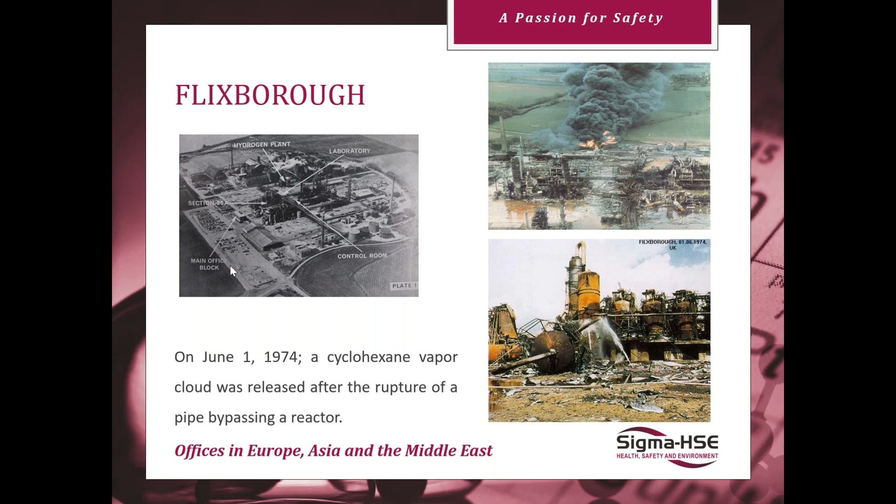So QRA would have given us good insight into how that might have been avoided in the first place. We can use it for risk management, for guiding our decisions as to how to make things better. We can increase awareness for hazards, and that leads into very good process safety management, like appropriate training for people. It helps with emergency response planning as well—if you know where people are most likely to be hurt, we can plan our emergency response around that.

It allows us to communicate our risk to the public as well. Whether you think that's a good idea or not, it is a legal requirement, especially if you are operating a COMAH site, where there is a duty on you to release information to the public. If you're going to have off-site effects, and QRA will tell you whether that's likely, communication of risk to the public is a good idea. It's also sometimes a duty under the regulations, where you've got major accident hazard potential, to do some form of QRA to demonstrate to yourselves, your shareholders, your customers, your suppliers, and your neighbours that you are fulfilling your duties under the regulations and that you understand your hazards and risks.

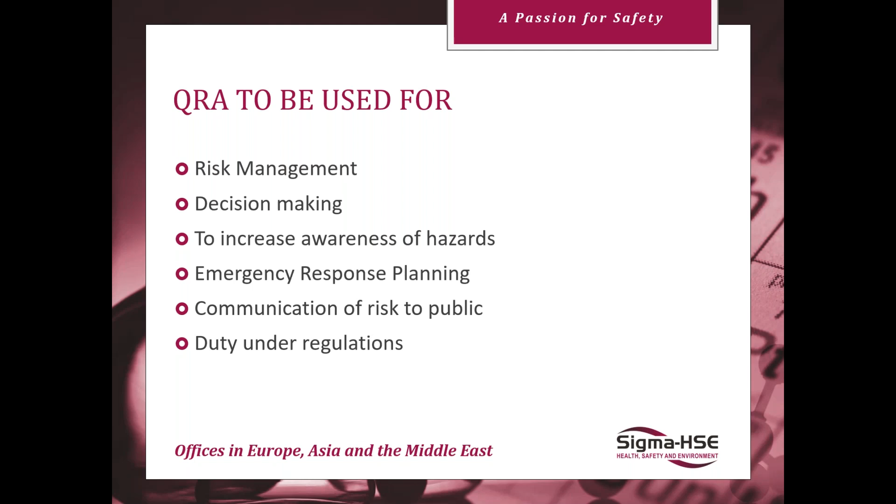So the process of risk management: first of all, what are we trying to achieve? What is the design intent? What is your process intended to do? Then the first question from the regulator: what could go wrong? We do that typically by some form of process hazard analysis, whether it's a HAZID, a HAZOP, a checklist, or whatever your preferred methodology is, depending on how big your risks are. How likely it is and how big an impact—that's the risk analysis part.

And how significant that is, and therefore what you need to do to reduce that risk, is the risk assessment. It's a case of 'so what?' Once you've done the risk analysis—risk of what, from what, and to what—then that fourth question is 'so what,' and that's the risk assessment side. Therefore, what is the most cost-effective control or mitigation option available to you? That's the risk management side—how you manage those risks and reduce them as a result of good management.

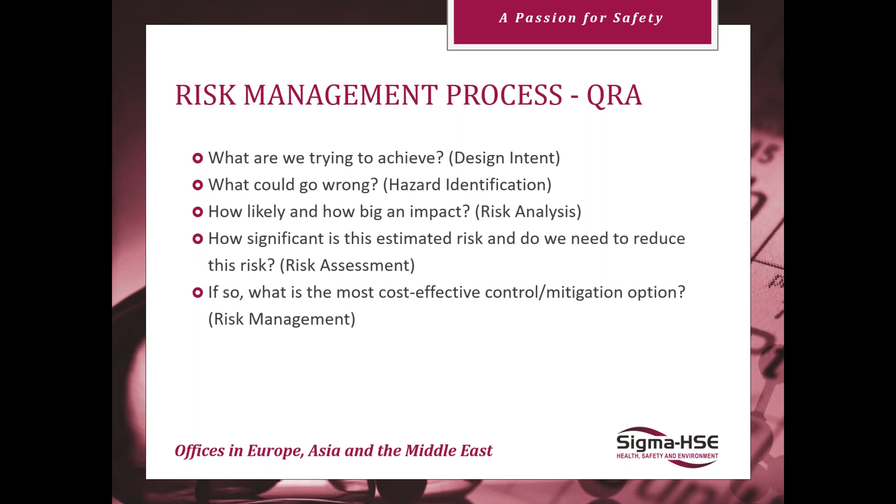So, as with all good policies and procedures, we have a little flowchart to help us do all of that. This is the one that we would typically use for a QRA methodology.

We'd set scope and do a site visit first of all. So there's a little bit of pre-work to do to define what the scope of the study is going to be, and then to visit the site and collect all the data that goes along with it. Things like hazardous properties of materials, the way that you're processing, the conditions of temperature, pressure, flow rate, and so on.

And then we can go into a form of hazard identification study, which will generate the scenarios. If any of you have been in either a HAZID or a HAZOP, you'll know that the way we generate scenarios is by these deviations from the design intent. And that gives us a number of potential scenarios along with their consequences.

So the frequency and the consequence analysis are what we need to do next, because one is the hazard, the other is the frequency, and together those are what give you the risk. Because this is quantitative risk assessment, we put some numbers on that as well, and we'll talk a little bit about how we do that in the coming up slides.

But by putting numbers against it, we have a numerical representation of risk, we have a numerical representation of consequence as well, and that means that we can be considerably more confident about the amount of harm that we're going to inflict potentially on people or on the environment by looking at the ranges to particular radiation levels or the ranges to particular concentrations if it were a toxic material.

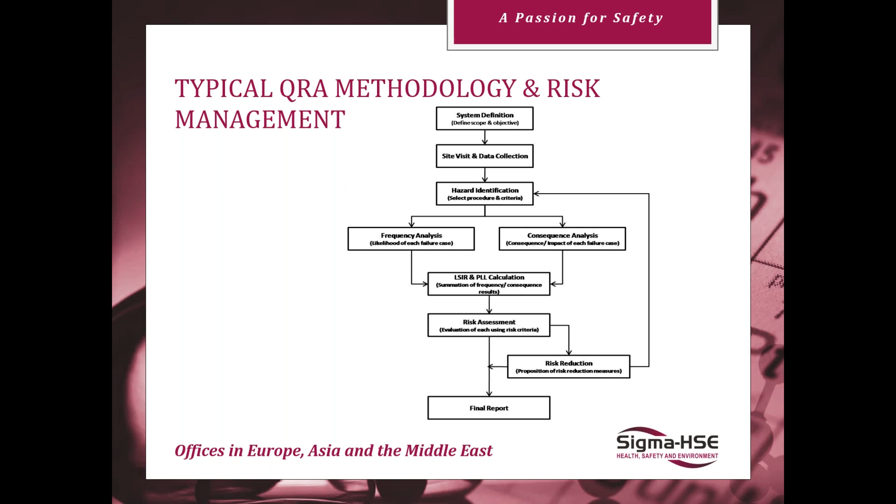So there's a little flow chart. For hazard identification, I mentioned a few other tools there.

They vary in terms of rigor, I suppose. That's probably the best way of putting it. If you've got a relatively benign process involving a lot of water and not much else, then things like checklists and brainstorming activities can work perfectly well. But if you've got a thoroughly integrated oil refinery or something, then something like hazard and operability study would be the way to go. But there are lots of others as well.

HAZID, if you've ever come across those, is like a HAZOP. It's sort of a HAZOP light. It still uses guide words and therefore it's quite rigorous all the same, but it's a little less resource intensive. But we have things in here as well, like failure mode and effects analysis, and fault trees and event trees, all sorts of techniques. Some more fun than others. It depends whether you do them with me or not, but yes.

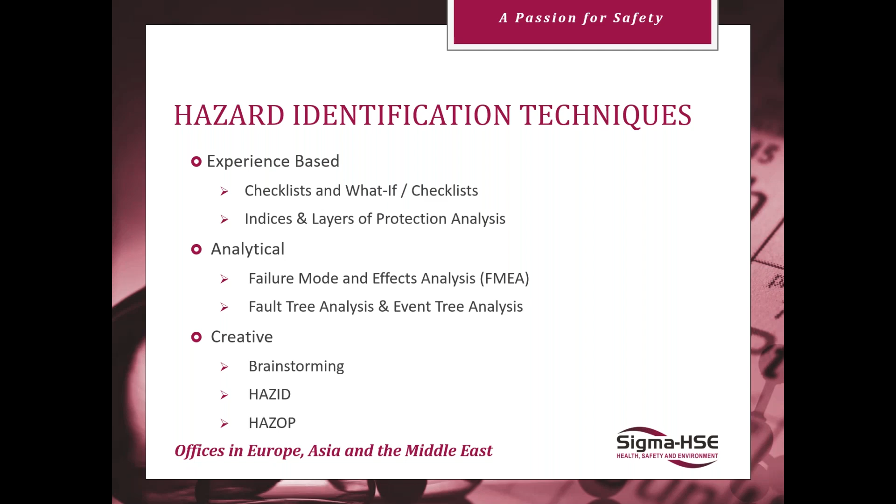Now, I mentioned right at the outset that we need to define a term, an extent of the study. Once we've got that, we sectionalize it. That's an awful word, but we divide it into sections or nodes or whatever it happens to be, your preferred nomenclature. But the idea is that if you can identify...

Isolatable sections, what the inventory is likely to be, in particular if you go, for example, between ESD valves, you've got a fixed inventory that sits within there, and that allows us to generate the worst case consequence rather than just having a portion, if you like, released. It also aids in the understanding of the process, so you're not faced with too many scenarios to model at any one time, and it means that every single element is given its own importance. And that's a very useful thing to do, having sections that are not too large that they become unwieldy, but not too small that they become unrealistic, or at least unrealistic to do in the time available to you.

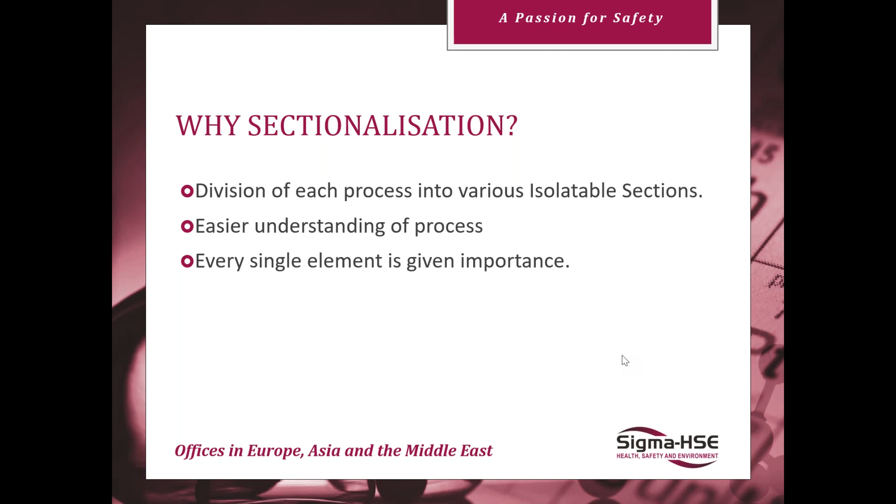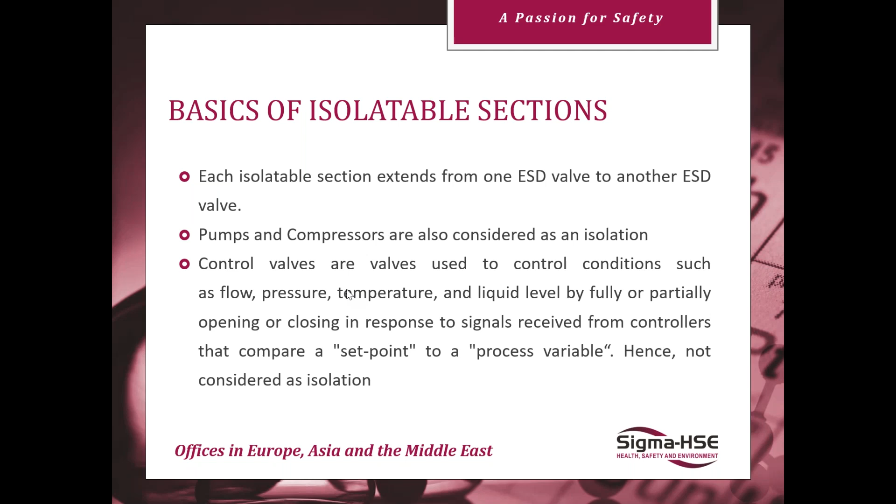Control valves are used to control rather than provide shut-off, so we don't usually consider those as isolations.

Now we can go into talking a little bit about the consequence calculations themselves. This is, at its most basic, the application of mathematical formula to the consequences from toxic and flammable releases. There are various tools you can use to do this, and they don't differ greatly because the underlying mathematics that supports them is well understood and pretty sound these days.

If you're looking at the release of material from an orifice, for example, you'll know this will be influenced by things like internal pressure and therefore the flow rate out, the buoyancy, the temperature, and atmospheric conditions as well. Those are built into the model, and at its most high level it's a normal distribution looked at with three axes - an axis running in the same direction as the release direction, one at 90 degrees horizontally, and one at 90 degrees vertically.

There are therefore three normal distributions you could look at, one in each of those planes. We use the mathematics - pressure, flow rate, etc. - to determine how wide that normal distribution is, and then use things like weather conditions to influence the shape of the normal distribution. We can distort it to one side or another via manipulating the standard deviation. If you didn't get all that, I don't blame you.

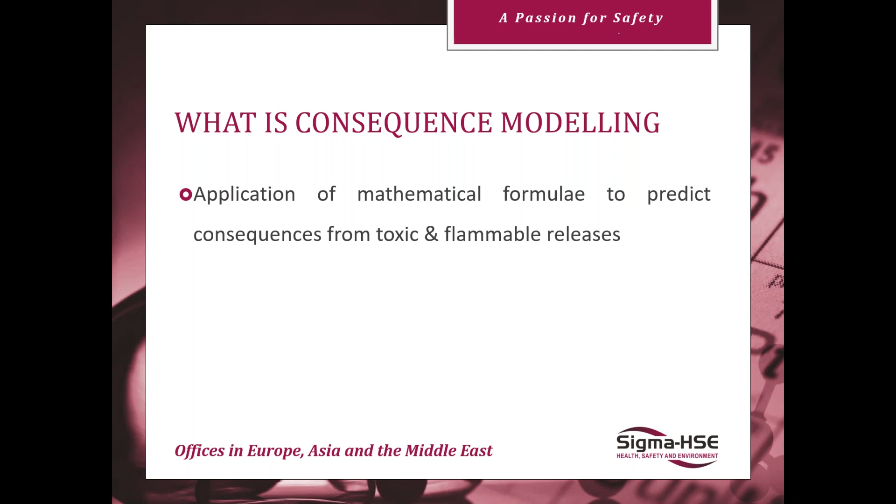We need to model various discharge rates. We need to know the size and shape of flammable and toxic gas clouds in order to see what happens when that encounters a person, whether we ignite it or not. The consequence modeling software will also tell you the distances to various levels of radiation or to various concentrations if it were a toxic release, and also the distances to various overpressure values in the case of explosions.

What I haven't found that it does at the moment is sudden releases of energy due to things like a pressure burst - for example, if you just popped a balloon, the pressure burst associated with that is slightly different. But there are other tools and techniques for modelling that kind of event.

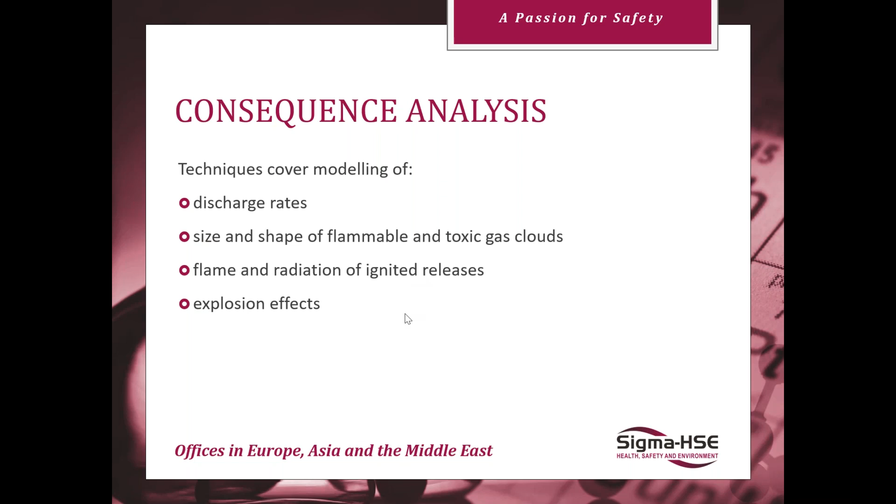So there are a number of consequence effects that we would look for. If we ignite things, we've got various forms of fire - a pool fire, a flash fire, or a jet fire. If we had a toxic release, we can have just a concentration that proceeds downwind and has the potential to hurt people.

And for explosions, we've got various types here as well - a BLEVE, or boiling liquid expanding vapor explosion, vapor cloud explosion, or indeed a detonation. We never used to consider detonations as being terribly likely to happen, but since Buncefield, which proceeded to detonation, we now include that as well, known as a Buncefield type incident. It essentially means it's not just a combustion reaction going on - the molecules are physically being banged into one another by a propagating shockwave, by virtue of having confinement in the area and congested plant, which tends to accelerate the flame as it goes around obstacles.

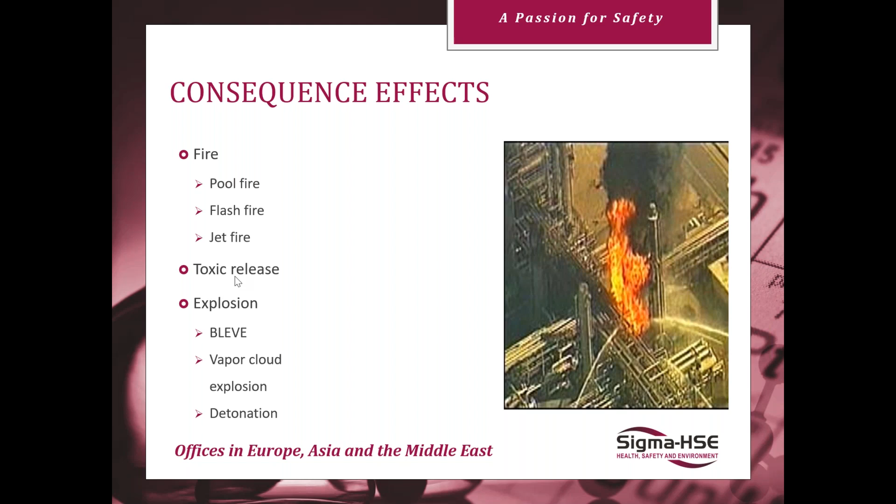So those are the various effects that we can have. For jet fires, let's have a quick look at those. This occurs where gas is atomized, or an atomized liquid is ignited close to the source of release, and you end up with a jet flame as a result.

The amount of damage it can cause depends where you are, essentially, because they are pretty directional, as you might expect. The length of the flame and the direction being the principal things you would want to know, but also the temperatures you could get up to, the radiation levels you would generate from these events. Typically, they can burn very, very hot indeed.

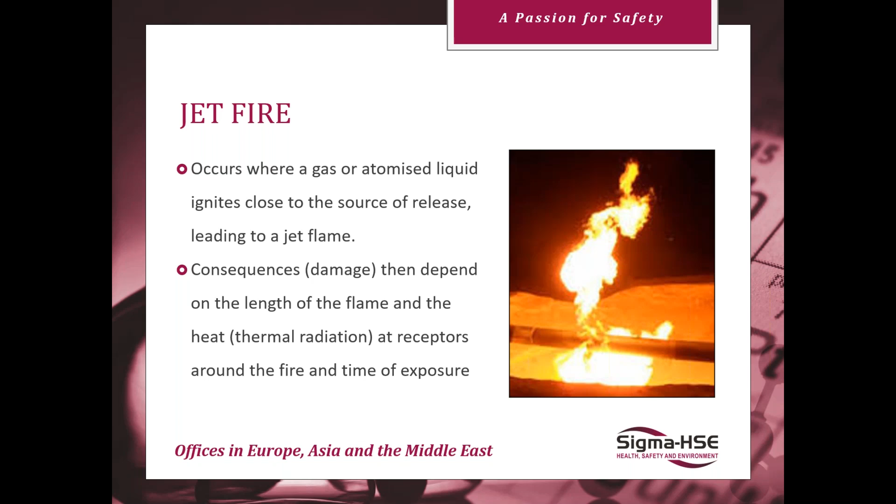Pool fires: a flammable liquid forms a pool, which then ignites. Again, it's the thermal effects. We generally assume people have a pretty good chance, unless they're actually caught in the pool, then it's much easier to walk away from a pool fire.

If it's a running pool fire, they don't tend to go that fast, although they can, of course.

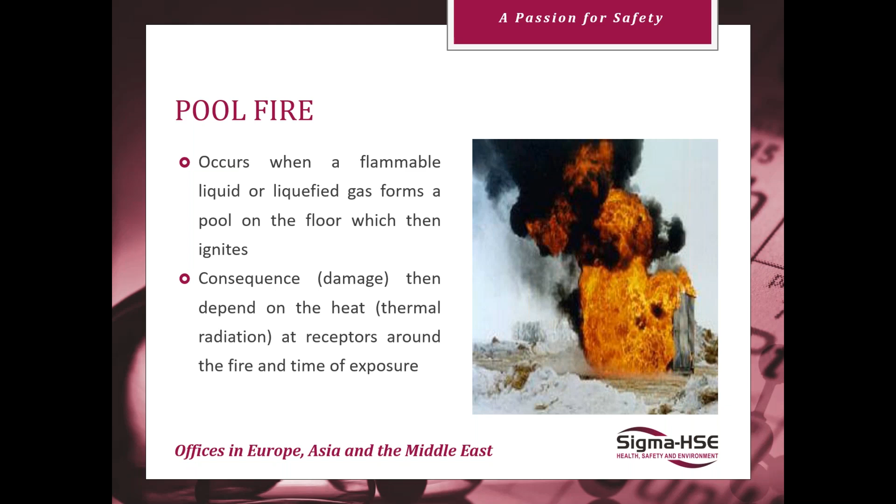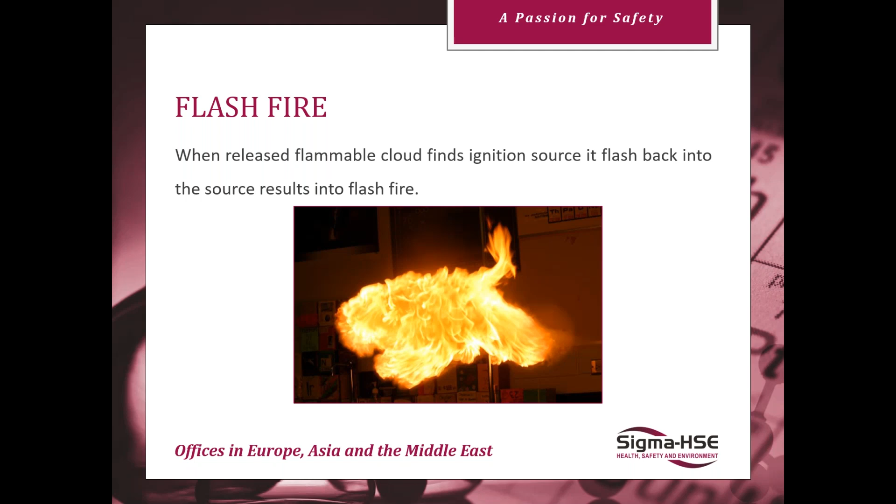Flash fires: a flammable cloud is released, it doesn't ignite initially, but finds a source of ignition subsequently and then flashes back to the source. That's what we'd call a flash fire. It's slightly different, it's less violent but very hot, less violent than a vapor cloud explosion, which is the next one, where we have a little bit of confinement.

In order to have an explosion, you need something for the combustion gases to react against in order to generate pressure.

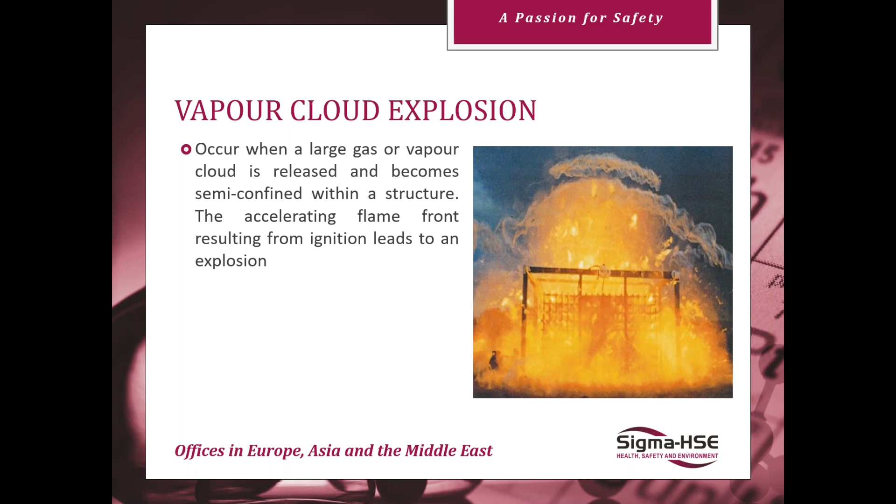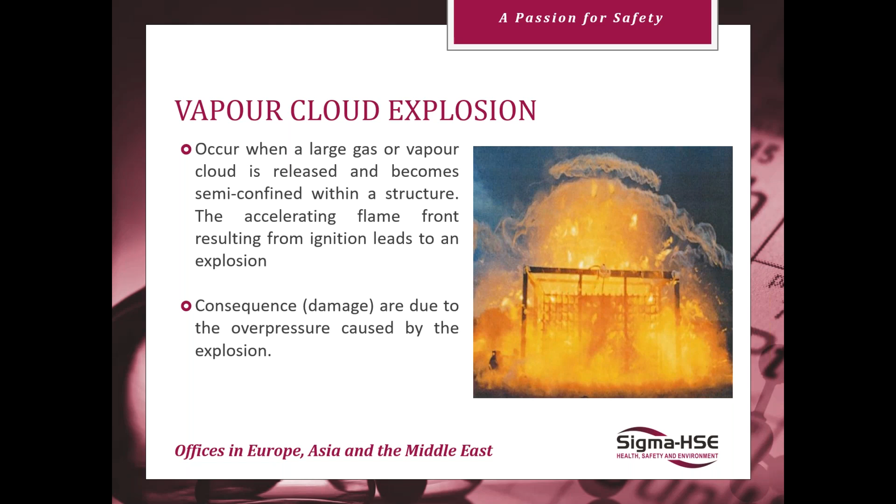The flame front tends to accelerate, and if it's unconfined or has less confinement, it accelerates to less than the speed of sound. If it accelerates to greater than the speed of sound, as is the case with gases like hydrogen or ethylene, those can proceed to detonation quite well, which is why you tend to get more of a bang with those. As well as the radiation effects, you've got the consequence arising from the overpressure generated by the explosion, this accelerating flame.

A BLEVE, if you've come across these, no doubt you've seen the videos on YouTube of boiling liquid expanding vapor explosions.

Essentially, you've got something that wants to be a gas, restrained by, for example, a vessel, and that vessel goes, and everything that wanted to be gas suddenly finds its opportunity to become gas. If it's flammable as well, then you can end up with a very, very violent explosion, but you don't need it to be flammable, because you've got the vaporization and the change in volume that's also associated with that change in pressure. So as it vaporizes, it generates the consequence at the same time.

They are extremely violent explosions. So if you haven't seen the videos on YouTube of a BLEVE, go and check those out.

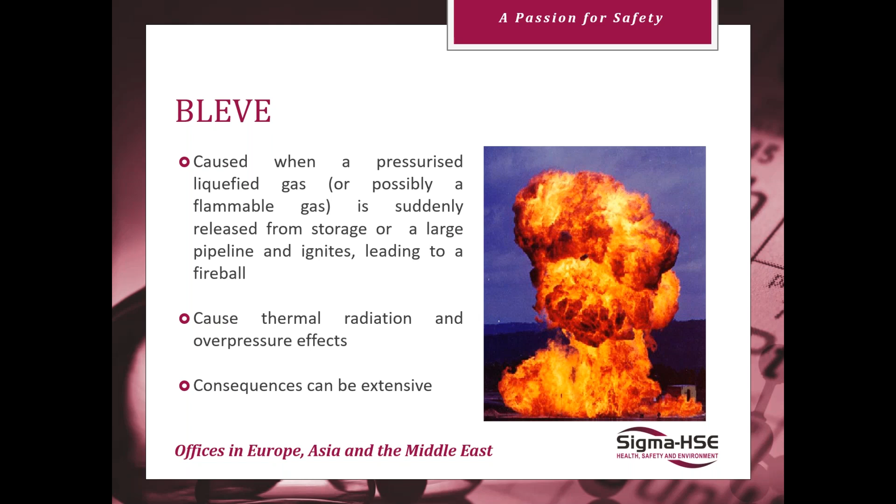So the modelling will give you the distances to various radiation levels as a result of the consequences I've just described. Other things we need to take into account are built into a lot of the modelling software as well.

These are things like atmospheric stability. We have two considerations to look at. One is thermal turbulence, which is just the natural heating and cooling cycle of the land mass in the atmosphere. And then there's mechanical turbulence, which is generated by the wind speed. This is a tricky one, because it can lead to counterintuitive effects.

If you think about a release from, for example, a relief valve, which is up at high level and perhaps angled away from the vertical by about 45 degrees: if you had a very fast release, a high velocity, a high volumetric flow rate through there, you might expect the cloud to go further, because you'd be considering things like momentum of the cloud, and you'd be right in that respect. However, there are other things that influence that, and as you have a higher speed exiting the tailpipe, you can also get a higher entrainment of air, which tends to dilute that cloud a little faster than it might otherwise have been.

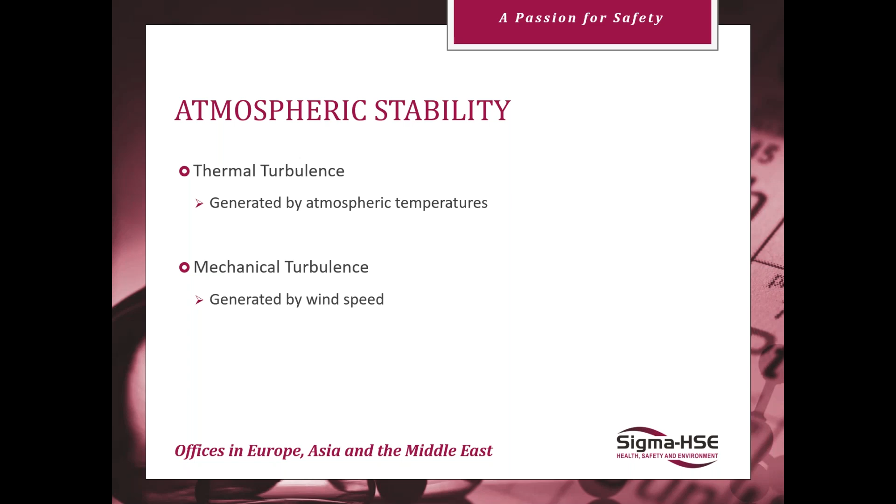So you can end up with almost counterintuitive concentrations downwind of the release. Modelling is important to do in that respect, because you wouldn't necessarily know that any other way than if you actually applied the mathematics to it. So it's worth bearing in mind.

We generally model according to something called the Pasquill Stability Scale. For the UK, we use 2F and 5D a lot. The 2 refers to the wind speed, so 2 meters per second, and 5 meters per second. The letters tell you whether it's day or night and how much sunlight you're getting. So 2F is a clear light wind night, and 5D is a little bit breezier, could be in the day or at night, doesn't matter.

But those two have an effect on the normal distribution that I mentioned earlier. They can move the cloud further downwind than you otherwise might have expected, or to one side, or increase or decrease buoyancy as a result as well. So it's important to know where you stand and do at least a couple of different weather types when looking at the QRA.

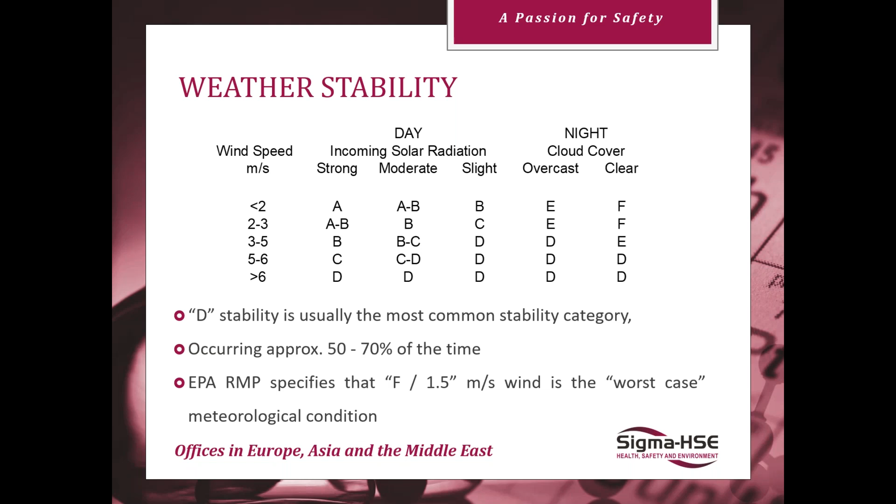Event trees are very useful. Depending on the type of release, we can build this into the model as well and do a frequency analysis on what is the most likely impact of having the loss of containment.

And for an instantaneous release, it's a similar sort of exercise. Whether it's more likely or less likely to be any one of these is going to be down to the material properties, your judgment, whether there is a hard source of ignition nearby, or whether you've got good design. You've had somebody like Sigma come in and do your design risk assessment. You haven't put any flares nearby, and the smoking shelter isn't nearby either. So that'll be very much down to the way you operate.

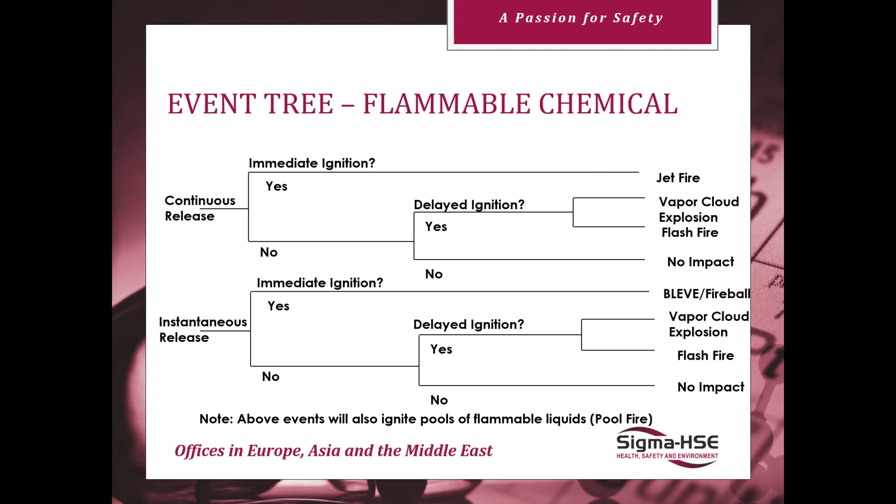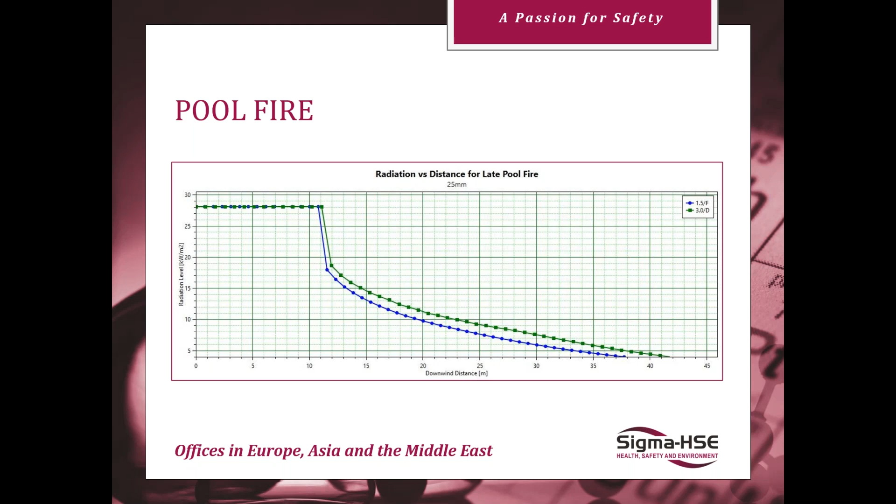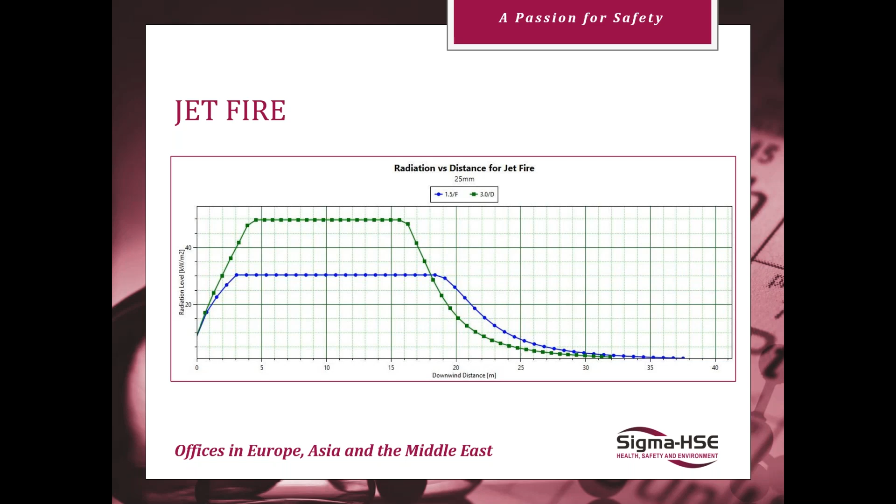For a jet fire, we have a similar sort of plot. Once you're downwind, the radiation level drops off. And again, you can see there that we've done this for two different weather conditions, 1.5 meters per second wind velocity under stable conditions, and 3 meters per second velocity under less stable conditions. So you see that those weather conditions do indeed make a little bit of difference. And that difference could be significant, especially if there's somebody standing there.

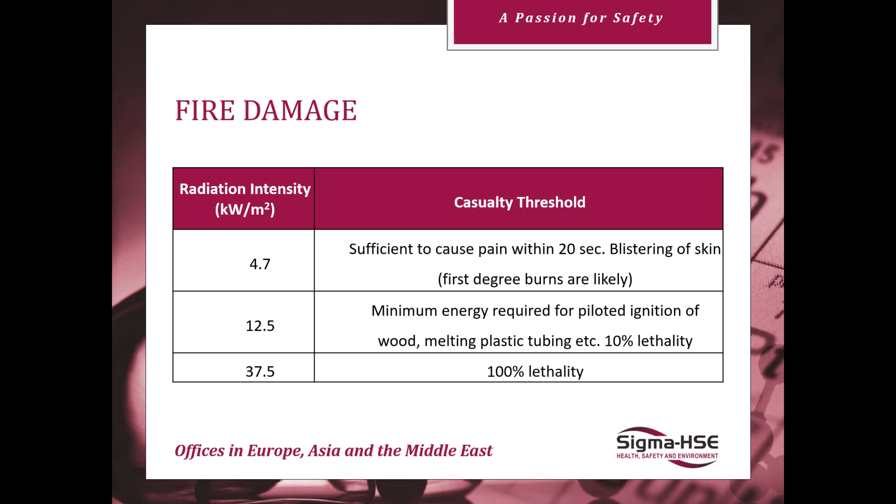Now, judging whether you're going to do any harm or not requires some kind of measurement and thresholding. And we generally use 3 levels: 4.7 kilowatts per meter squared, 12.5, and 37.5 - 37.5 being 100% lethal, and 12.5 being around 10% lethality as well. It gives people a chance to get away, but it still wouldn't be very pleasant. And 4.7 is still causing burning of skin and so on. So people would tend to escape from that quite quickly, but it doesn't take much more for it to become lethal. So it's worth understanding those numbers.

For a flash fire, we've done a plot here, and you'll notice now that we are more omnidirectional. So this is a plan view of a flash fire envelope. We've got crosswind distances and downwind distances. So the plots that you see correspond to flammable limits, or percentages of flammable limits. I think we go down to half of the flammable limit, 50% of the LEL. And that gives you the range over which you might expect to ignite your cloud if there were a source of ignition present.

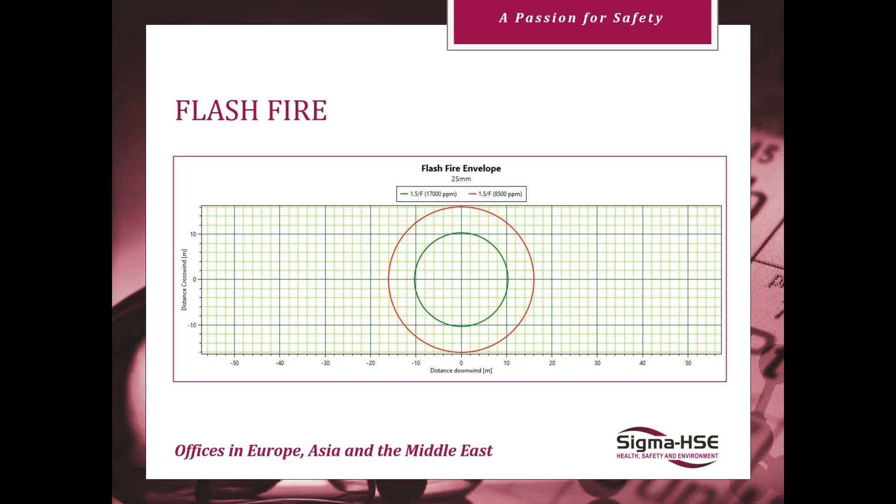The reason we have data like this is that we've done testing. Places like the HSL, the Health and Safety Laboratory, they will test explosives, and it's a power law relationship. So they'll set off a certain mass of TNT and then work out what the equivalent is based on the chemistry of the component that you're handling. The other way that we've got the data, for example, for the damage to buildings, is because we have very good data from the Second World War. When bombs were dropped on London, we got a very good idea of the amount of damage that a particular overpressure level could do.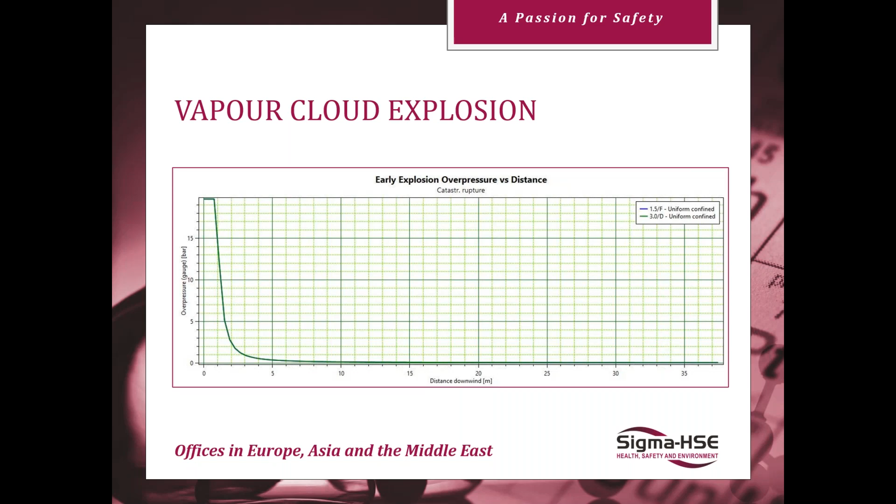So for explosion damage, we have a similar sort of scale. We work here to 0.03 bar, 0.1 and 0.3 bar, and the effects on structures and the effects on people as well. It's generally speaking better for you to be outside in the event of an explosion, because it's things like flying glass and collapsing walls and buildings that produce an awful lot of the fatalities associated with explosions.

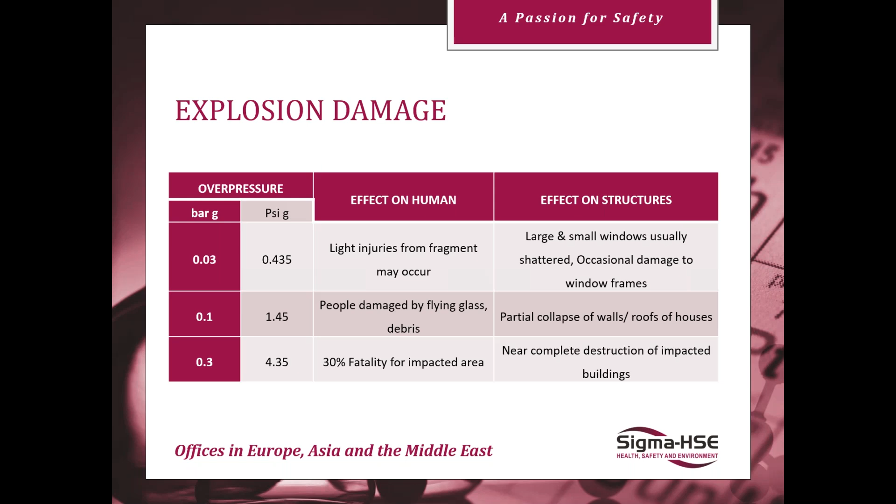And then toxic impact as well. We have two things to consider with toxicity. One is the nature of the chemical and its mechanism on the human body, and that's its toxicity. The other is the exposure duration, the amount of time that somebody might be exposed to it. And that, when it comes to consequence modelling, is absolutely critical. It's a function both of concentration and of duration.

So for some chemicals, a high concentration for a short duration might give you the same effect as another chemical's low concentration for a much longer duration. And we have means of extrapolating that and working it out.

But first of all, you would get an MSDS, a material safety data sheet, which will give you the limits, which are quotable limits. Things like the ERPG, the Emergency Response Planning Guidelines, IDLH, immediately dangerous to life and health, TLVs, threshold limit values, short-term exposure limits, and so on. Those are tied into concentrations and times.

Now, some years ago, I was looking at the release from a single cylinder of carbon monoxide. Because the scenario we were looking at was where it discharged in about 2 minutes, these values were not much use to us.

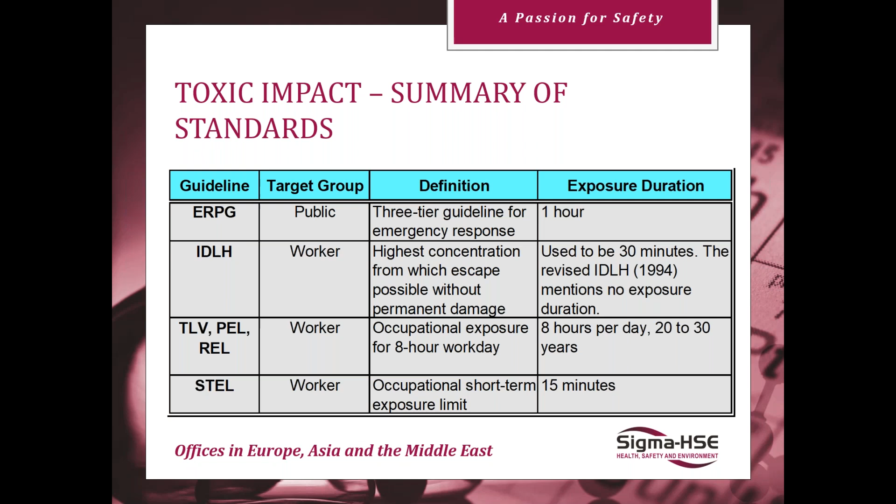So if you do that, it means you can tailor the concentration that would give you that dose to the time that people will be exposed to it. In my case, it was 2 minutes. If anybody was standing next to the cylinder for the full 2 minutes, what sort of dose would they get, and was it likely to cause them any harm? The ERPG and short-term exposure limit would not have been any help, but you can derive those figures from things like the SLOT and the SLOD. So I actually find those two measures considerably more useful than the ones on an MSDS.

So we've got an idea of what the consequences might be, and we've got some numbers that go with it. Now it's time to look at the risk side of things, the probability or the frequency with which we might get the release in the first place and have that harm occur.

So the likelihood is the probability or the frequency of an event, and it's estimated as one of the event for which we calculated the consequence -- my slides are out of order -- yes, that's right, that's fine. So it's the scenario for which we're calculating the consequences.

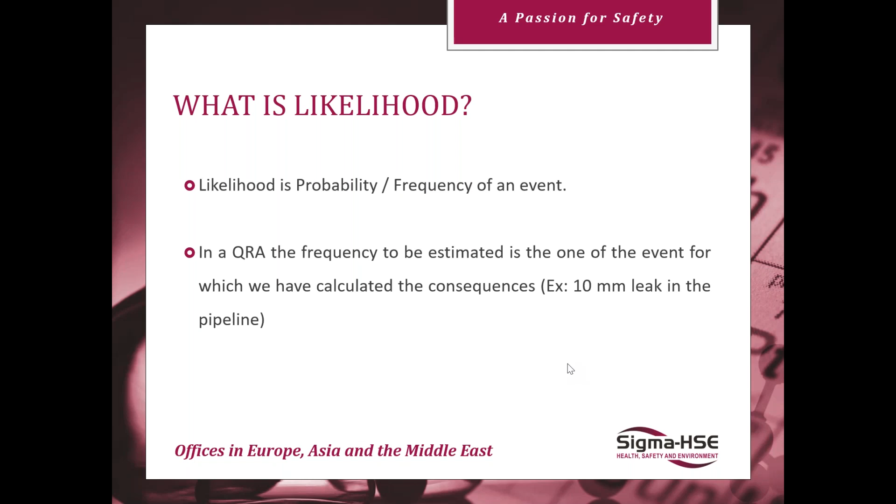For example, a 10mm hole in the pipeline. So we need to know how often we might get a 10mm hole in the pipeline. The way we do this is to first of all conduct a parts count. For each isolatable section, from our sectioning or sectionalization earlier, we look at the number of components, valves, and pieces of fixed equipment, and fill them in on a sheet.

And then we compare that with a base frequency sheet, available from various agencies. The UK HSE is quoted here, and the OGP -- I've forgotten that particular abbreviation, it's going to escape my mind at the moment -- but it includes the release frequency for various leak sizes and various pieces of equipment.

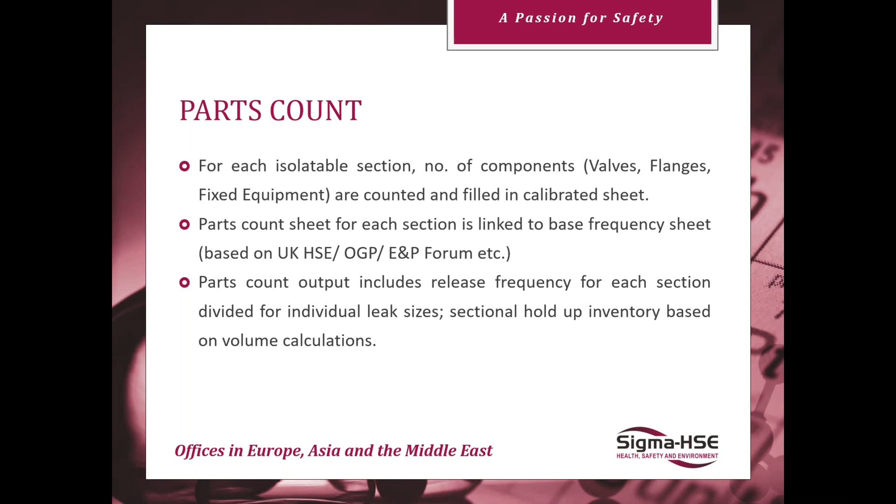I'll show you an example of what one of those looks like. So this would be a base frequency. For things like compressors and centrifugal pumps and so on, we've got a variety of hole sizes and the frequencies associated with getting holes that size. Same for filters, flanges, heat exchangers, pig launchers is in there as well. So those are the frequencies we might expect for that kind of hole or release per year.

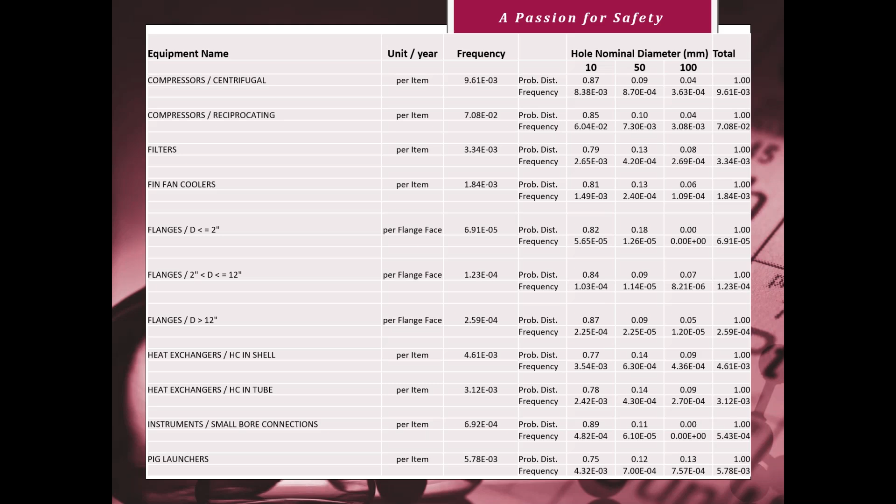Obviously, the more that you have of various items, the more likely it is, because you've got multiple opportunities for it to happen. So we tie it into a sheet like that, and we produce our own sheet, which might look like this. We'd look at the inline equipment, see how many pipe runs we've got of a particular diameter, compare that with the base sheet, and that's going to give us a factor to multiply by that base frequency, giving us an overall frequency for the section of plant we're looking at.

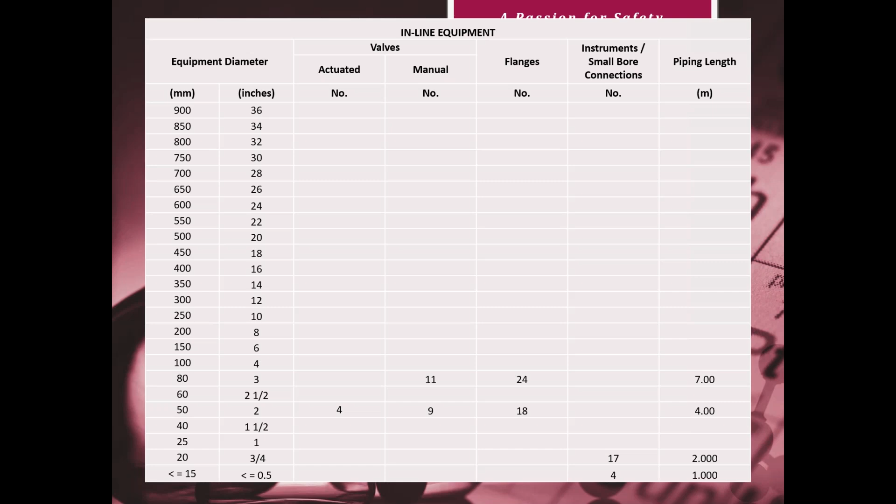We would do normally a range of leak sizes as well. Bear in mind that a smaller leak size is going to have a lesser consequence than a larger leak size, unless you don't notice it. A 2 mil hole might go unnoticed for a while, whereas a pipeline rupture you might notice quite quickly. So be careful when comparing apples with apples, as they say. But we would do a range normally: a small, a medium, and a large hole, and some ranges there, and also a full bore rupture.

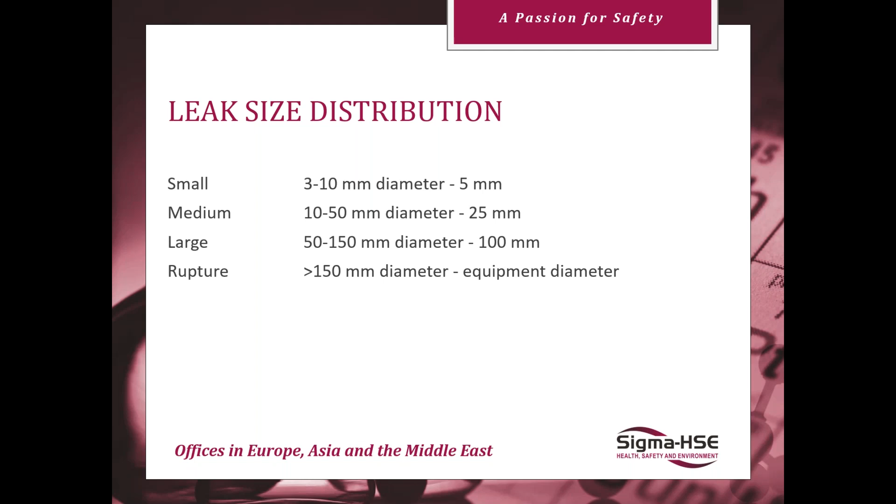This is fairly standard, and those of you who come from COMAH sites will be very familiar with that kind of approach. There is also a database provided by other agencies. I mentioned the UK's HSE database. DNV has its own database, the Centre for Chemical Process Safety, the CCPS. The TNO, the Netherlands Organisation, it used to be called their Purple Book, I think, but I've slept since then. They've updated it - it's now called the BEVI 3.2 guidance. Cox et al., the Lees Loss Prevention in the Process Industries as well, which will give you some frequency data as well.

Now, a word of warning on this as well. If you use database values, bear in mind that those values will have come from all possible corners of the earth, under all possible maintenance regimes and qualities of company, shall we say. If your maintenance program is lacking, leaves a bit to be desired, maybe you haven't done any for a while, your frequencies might be worse than the ones quoted in the database. So be careful - make a realistic qualification of where you actually use these figures, to make sure that you're not claiming credit where it's perhaps not due.

But what this allows us to do is come up with initiating event frequencies in a structured and thorough, or more robust, way. So we get a genuine idea of how likely it is that for that year, we're going to get a 5 mil hole in a particular piece of plant. That would give us the likelihood of getting the release in the first place, but we also need to look at what the likelihood is of getting a particular consequence as a result.

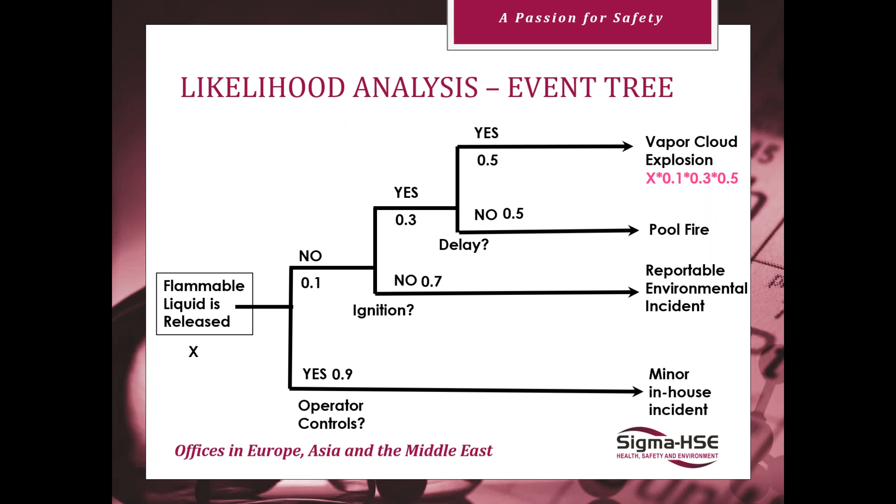And again, this will very much depend on the way you operate, as to whether you think you've got your source of ignition under control, the particular material properties - is it likely to self-ignite like hydrogen will - whether you've got an operator nearby in order to do some control, whether your control system is going to report the relevant data quickly enough to him to enable him to effect an action, and so on. So you can choose the likelihood of the yes and no answers to each of these to fit your own circumstances and come up with a likely, or the most likely, consequence as a result.

So therefore, we need to consider all these things. The frequency, we look at that through the base frequency and the databases that we looked at. Your plant itself - the number, the inventory of equipment, the fittings that you've got, so your parts list. Where there is automation to isolate, which means you've got a fixed inventory at a known pressure and temperature, so you know what's escaping. The probability of ignition is going to depend very much on the size of release, the material properties, and the way you operate. The weather, the wind direction, what time of day it is, and of course whether that is going to hurt people - so the number of people and the probability that they are local, or at least within the cloud or within the radiation envelope, in order for them to be hurt as well, and therefore the probability of fatality.

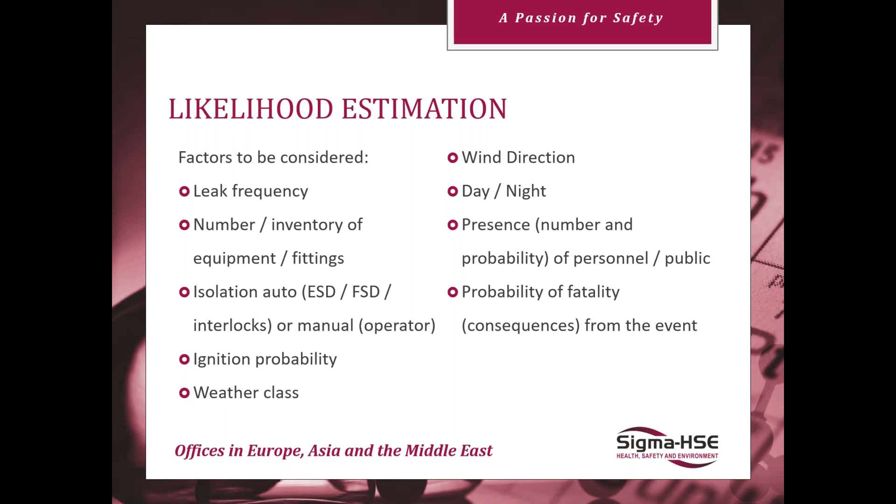That ties us right back into the abbreviations I introduced at the beginning: PPL, the probability of a fatality, and LSIR, the location-specific individual risk - how likely it is that we hurt somebody as a result of all this. That's where we come into the risk summation and analysis, looking at how we use these figures to make people safer.

So we have two measures: individual risk and societal risk. Individual risk is the risk experienced by this hypothetical person at a particular location. It doesn't have to be the same person - if somebody is on plant at a particular location and relieved by somebody else, they count as this single hypothetical person, because it's the location and the consequence that matter. It's not whether we hurt Joe, it's whether we hurt anybody at that location.

So this gives us two measures, the location-specific risk and the individual-specific risk, expressed per year. That allows us to tie into a tolerability criteria - how often are we prepared to kill people? That sounds bad, doesn't it? We should be never, but how often does it have to happen before we get prosecuted and find ourselves in serious trouble?

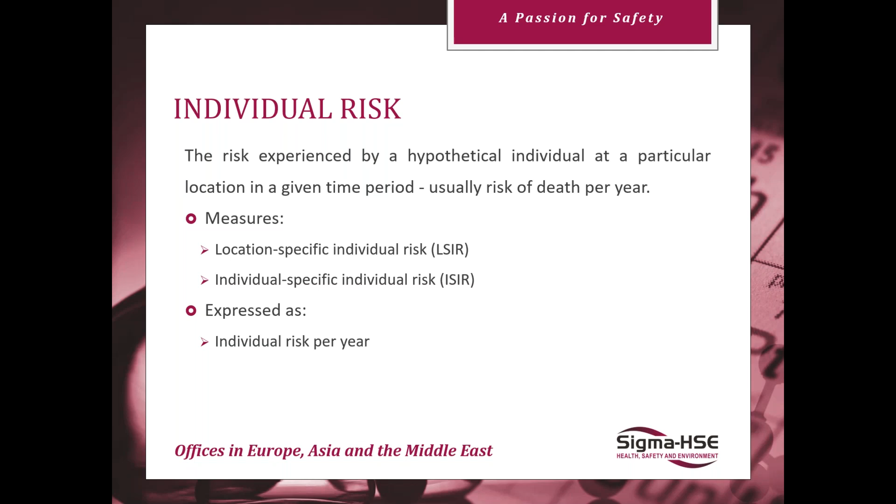And then there are individual risk contours, which is a commonly used presentation to inform the public. It's mainly used for land use planning, actually. That represents a contour which represents the frequency at which any person assumed to be there permanently sustains a given level of harm. So it's a frequency plot.

Typically in land use planning we use a 3-zone plot, calibrated to a 50% risk of fatality at rates of 1 times 10 to the minus 5, 1 times 10 to the minus 6, and 3 times 10 to the minus 7. That's 1 in 100,000, 1 in a million, and roughly 3 in 10 million - but that's a 50% risk. You can plot those on a map and determine the number of people who might be hurt from a societal point of view from a single event.

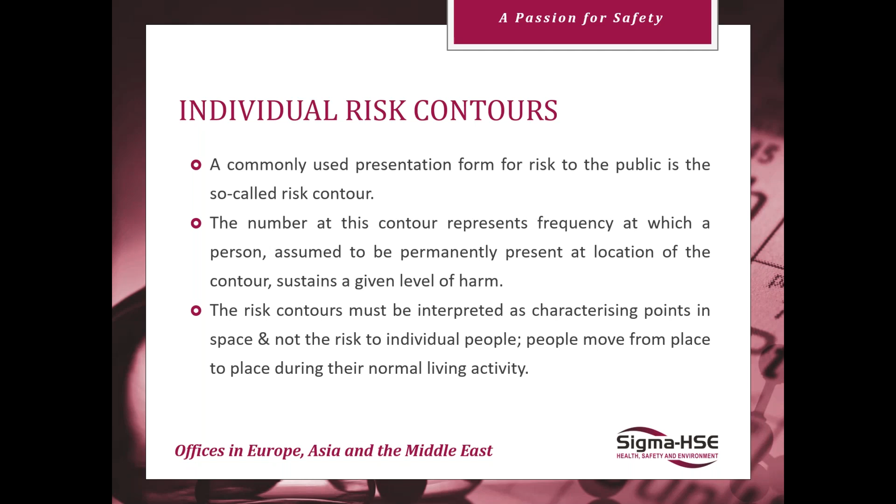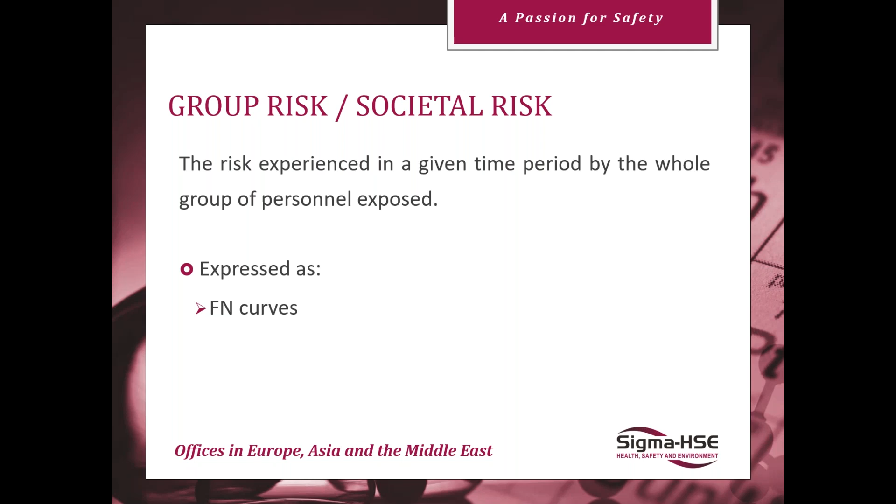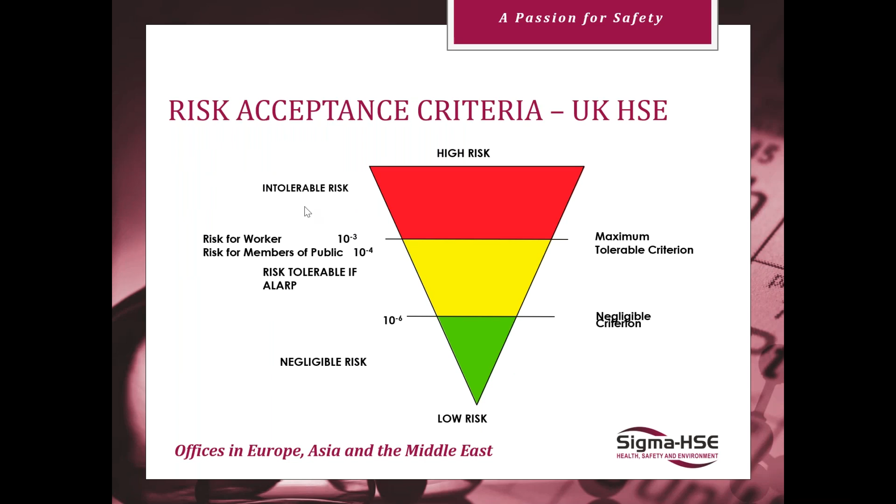If you find that your risk, either from an individual - the yellow bit here - or from societal risk, is in the ALARP, you need to ask yourselves two questions. This is in the guidance: what more can we do to reduce the risk, and why haven't we done it? The answer to why haven't we done it is usually it's too expensive.

So some form of cost-benefit analysis must be done. You must demonstrate that the costs of any remedial work are grossly disproportionate to the level of risk reduction that they would introduce. Otherwise, you are not ALARP, and you should put in place some risk reduction measures. So that's what ALARP means.

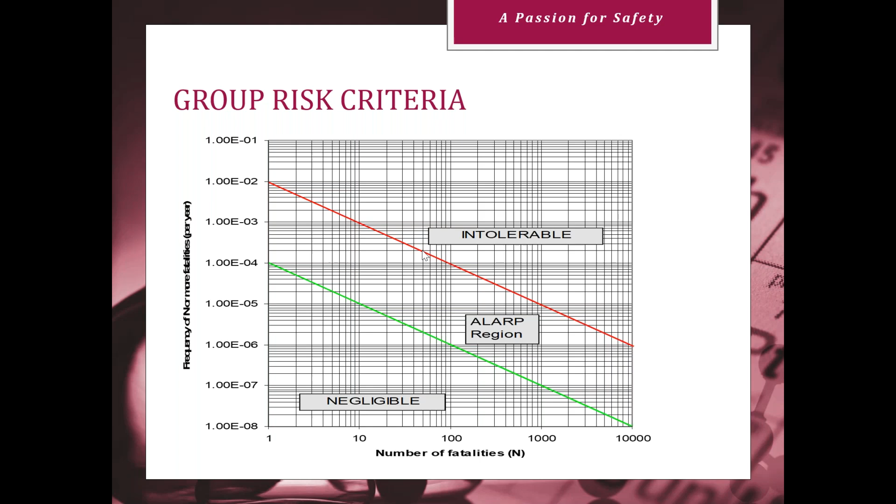So because QRA is better than the carrot that I showed you, the upside down triangle, it allows you to make much better, more cost-effective decisions and be more targeted in your response when it comes to putting in place additional measures, which are going to be the recommendations that fall out of any QRA.

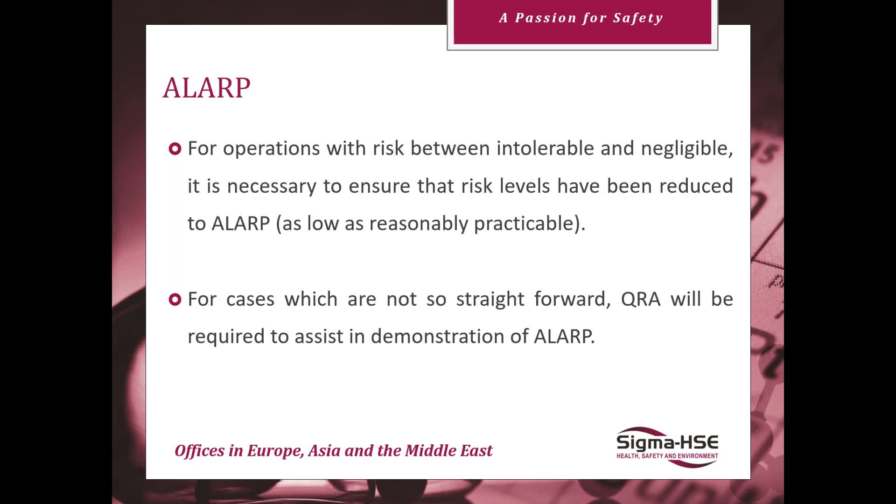Where you do get recommendations, view them with a certain amount of intelligence, I would say. For example, recommendations from a QRA might be something of this sort: hazard elimination - can you use something less harmful? Can you put in place some additional safety measures, i.e. spend a bit of money, go out and buy something that reduces the frequency or reduces the consequence?

After the event, can you put in place some mitigation measures - blast walls, deluge systems, emergency response systems? Or could you do something like moving people out of the way, which is often the most cost-effective solution and covers you through a whole range of potential losses of containment.

If you had 37 potential jet fires that could hurt 15 people, if we can move those people away, you don't have to look at the individual jet fires anymore. So look at, when you get the report from anybody who's produced it for you, and you get the recommendations, look at them individually, certainly, but look at them in the round as well. You may find that there are better solutions that can be made that would cover you for a number of potential scenarios rather than just looking at one scenario at a time.

It may save you a little bit of money, but that's essentially what you have to do. The QRA bit - the frequency analysis, the consequence analysis, the numbers that sit behind it - trade off conservatism for accuracy. That means you can spend your money better, that means that when you do spend your money you'll get better value for it, and that means you can do more good with it as well.